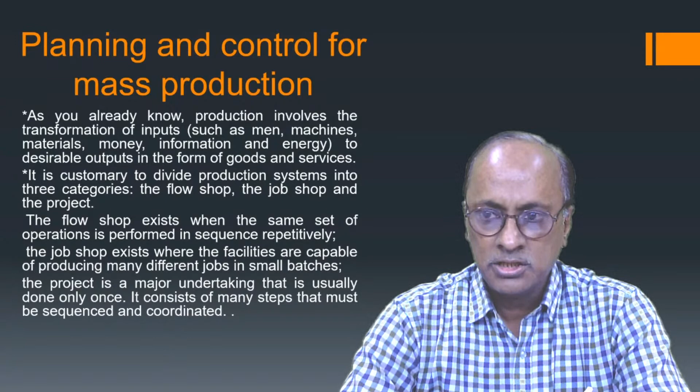So to start with our discussion, I may say that production, which is a transformation process, may take different categories. It may be a flow shop, sometimes called mass production system, where standardized products are produced in a particular sequence with repetitive operations. When you produce different products in small batches, it is called job shop, and project is a major undertaking generally taken once in our lifetime.

Now, what is the nature of mass production? We'll today take up the topic mass production. If you go through the nature of mass production, it was Henry Ford who in 1913 introduced the assembly line and notion of mass production.

So when you talk about mass production, we generally think that the products are for the masses, or production in millions, or for the masses. Though it may be an outcome, it is not exactly the same in meaning. Mass production refers to the manner in which a product is produced.

When you talk about manner, this involves the decomposition of the total task into the minutest elements, the smallest elements, shown usually on a precedence diagram, and subsequent regrouping of these elements according to the norms of production. So an assembly line consists of workstations in sequence where at each workstation a carefully designed portion of work is done. Mass production requires that all parts of an assembly line be interchangeable and that all parts be replaceable, characteristics which permit production and maintenance of large quantity.

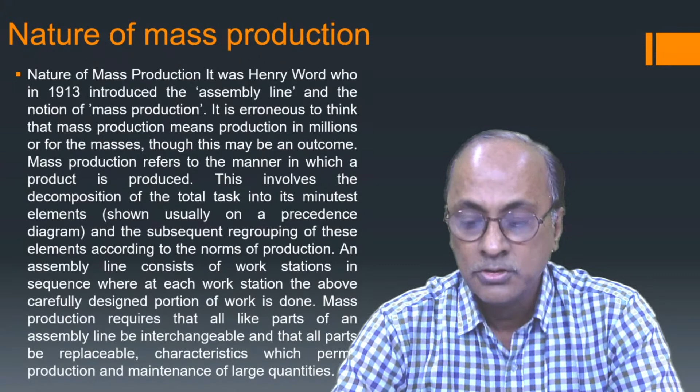So again, mass production is manufacturing a large quantity of standardized products, often using assembly line or automatic technology. Assembly line production, when you talk about mass production, goes hand in hand and should be taken into consideration. So what is assembly line?

It is a production line where materials move continuously at a uniform average rate through a sequence of workstations where assembly work is performed. Typical examples of these assembly lines are car assembly, electrical appliances, TV sets, computer assemblies, toy manufacturing. The arrangement of work along the assembly line will vary according to the size of the product being assembled, the precedence requirement, the available space, the work element, and the nature of the work to be performed on the job.

So assembly line production is a system where materials move continuously - there is no stoppage of materials movement, raw materials movement. It moves continuously at a uniform average rate. That means in the first hour it moves at a certain rate, say 20, and in the second hour it must be around that same rate - a uniform average rate through a sequence of workstations.

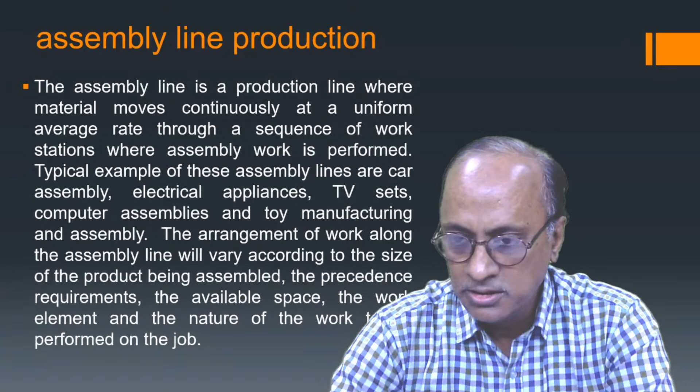So the question arises, where to go for mass production? It's generally agreed that mass production is justified only when production quantities are large and product variety is small. The ideal situation for mass production would be when large volumes of one product, without any change in design, are to be produced.

Continuously for an extended period of time. Now the rate of consumption or demand of the product, as compared to the rate of production, decides whether continuous or batch production is called for. Obviously, only when the rate of demand is greater than or equal to the production rate can mass or continuous production be sustained. If the rate of demand is less than the production rate, batch production with suitable inventory build-up could be resorted to.

So this means that when we go for mass production, first and foremost, you must remember that you prepare large quantity when variety is small. In other words, when products are standardized, mass production is the most ideal situation. The ideal situation for mass production would be when large volumes of one product are to be produced continuously over an extended period.

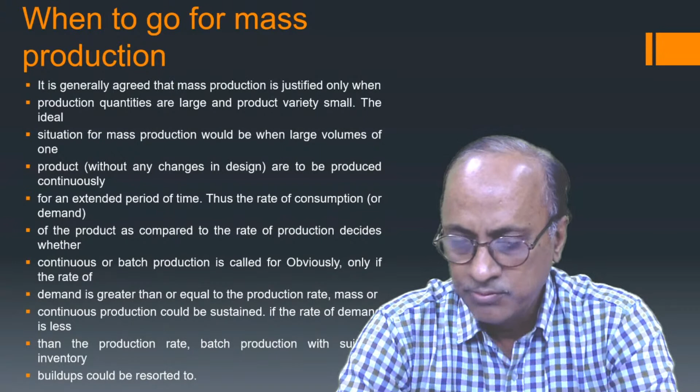and if the demand is greater than or equal to the production rate, then we have to go on producing continuously. If the demand rate is less, what happens? We can produce in batches and keep inventories; inventory build-ups could be resorted to. But if the demand is greater than or equal to the production rate, mass production is justified or advisable. So first, if the product is standardized with little variety or no change in design, we go for mass production.

And again, if the demand is greater than or equal to the rate of production, we go for mass production. Now there are different types of common flow patterns which you have in unit 4 of block 1. The I flow is like the alphabet I in a straight line. The L flow is like the alphabet L. The U flow is like the alphabet U, or it may be an S flow, or a circle flow, or an O flow. Since the work from one process is fed directly to the next, small process inventory results.

So what he says here—what are the advantages? The advantage is that in a mass production system, the production line may have a different flow, but the point is that suppose there are four workstations. The output from the first goes as an input to the second, the output of the second goes as an input to the third, and the output of the third goes as an input to the fourth.

So there is no in-process inventory; even if there is, it may be minimal. Total production time per unit is short because the materials move continuously. Since workstations are located so as to minimize the distance between consecutive operations, material handling is reduced. Since little skill is usually required by operators at the production line, training is simple, short, and inexpensive. Simple production planning and control systems are possible, and less space is occupied by work in transit or for temporary storage.

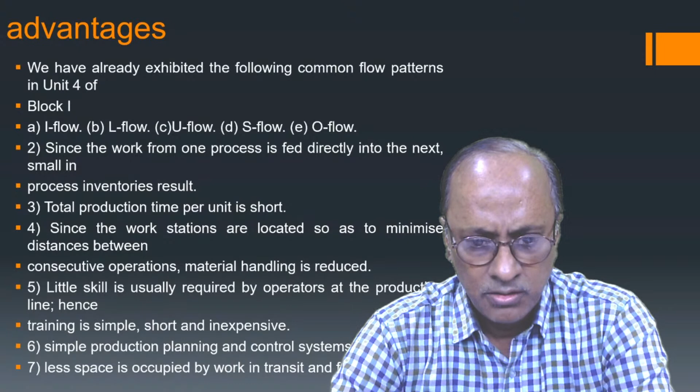Simple production planning and control systems are possible. Since the machines are positioned in a straight line or in a U flow, they have less transit and less space is required. Now, what are the disadvantages we find in mass production?

Since these stations or work units are positioned in a sequential manner, a breakdown of one machine may lead to complete stoppage of the line that follows the machine. Hence, maintenance and repair is a challenging job. This is very important.

As you remember, in a mass production system, the machines or workstations are positioned in a straight line, arranged in a sequential order. Suppose there are 4 or 5 machines. In between them, machine 2 or machine 3 breaks down. If machine 2 breaks down, then whatever output machine 1 sends, machine 2 is not in a position to receive it. Similarly, work at 1 is stopped, work at 2 is stopped, the 3rd work is stopped, the 4th machine's work is stopped. So the entire system is jeopardized, the entire system comes to a halt. So maintenance and repair is a challenging task.

Since the product decides the layout, changes in product design may require major changes in the layout. This is often expressed by saying assembly lines are inflexible. So mass production or assembly lines are inflexible.

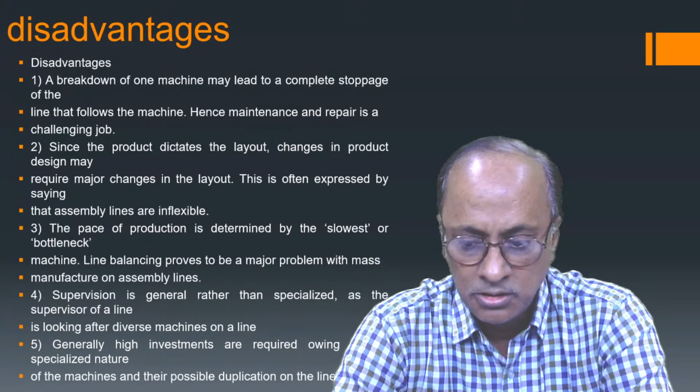Assembly line balancing is arranging the individual processing and assembly tasks at the workstations so that the total time required at each workstation is approximately the same. Assembly line balancing is strategically planning, locating, and sequencing workstations. Following are examples where there is a need to balance the assembly line in manufacturing: assembly lines for manufacturing automobiles, assembling aircraft, and shipyard production all require such balancing.

Assembly line balancing is nothing but arranging the individual processing and assembly tasks at the workstation so that the time required by each workstation is approximately the same. That means we are balancing it.

It is useful to consider two types of line balancing problem: assembly line balancing and fabrication line balancing. The distinction refers to the type of operation taking place in the line to be balanced. The term assembly line indicates a production line made of purely assembly operations, involving the arrival of individual component parts at the workplaces and their departure fastened together in the form of an assembly or sub-assembly. The term fabrication line, on the other hand, implies a production line made of operations that change the physical or sometimes chemical characteristics of the product involved. Machining or heat treatment would fall into operations of this type. So there is a distinction between assembly line balancing and fabrication line balancing.

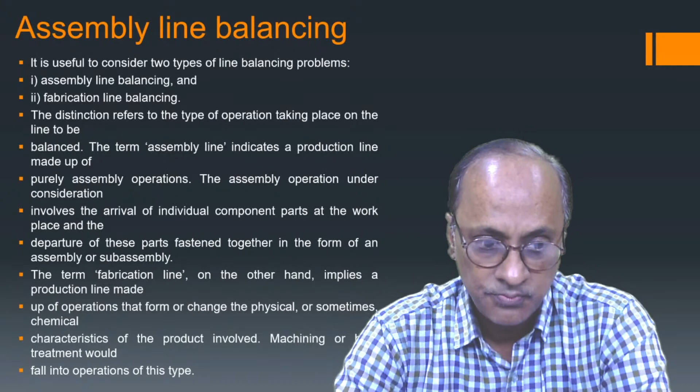The assembly line indicates a production line made of purely assembly operations. Assembly operation involves the arrival of individual components at the workplaces, and after arrival it is put together, fastened together in the form of an assembly or sub-assembly, we join it. But the term fabrication line, on the other hand, implies a production line made of operations which change the physical quantity or physical characteristics or chemical characteristics of a product.

What are the broad objectives of an assembly line? The broad objective in design, as seen in two important manufacturing developments which led to progressive assembly, are the concept of interchangeable parts and the concept of division of labor. This permits progressive assembly of the product as it is transported past relatively fixed assembly stations by a material handling device such as a conveyor. The work elements established through the division of labor principle are assigned to workstations so that all workstations have nearly an equal load.

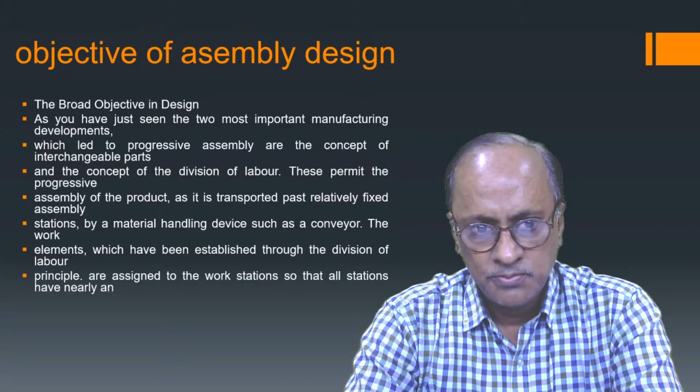Second is the division of work. The individual work elements or tasks are grouped into workstations. The station time, which is the sum of the times of the work elements performed at that station, should not exceed the cycle time. That means the time taken by a particular workstation is called the station time, and when you fix the station time, it should not exceed the cycle time.

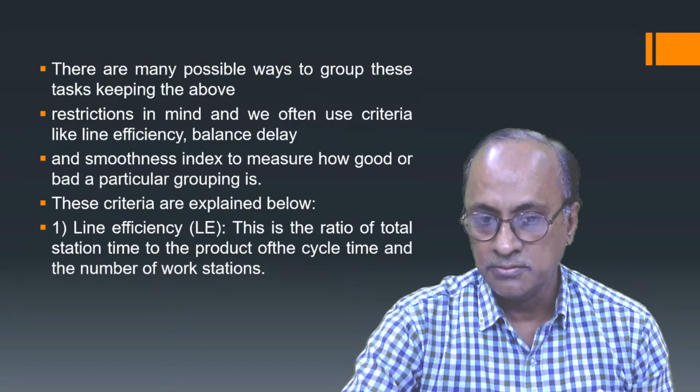Balance delay (BD) is a measure of the line inefficiency. It is the total idle time of all stations as a percentage of the total available working time of all stations. Suppose 10 hours is available and I am idle for 3 hours, so it measures that idle time as a percentage of the total.

Smoothness index is an index to indicate the relative smoothness of a given assembly line. A smoothness index of 0 indicates perfect balance, meaning the assembly balancing is perfect. So these are the 3 criteria.

Assembly line balancing is strategically planning, locating and sequencing workstations. We do this in aircraft manufacturing, automobile manufacturing, shipbuilding, etc.

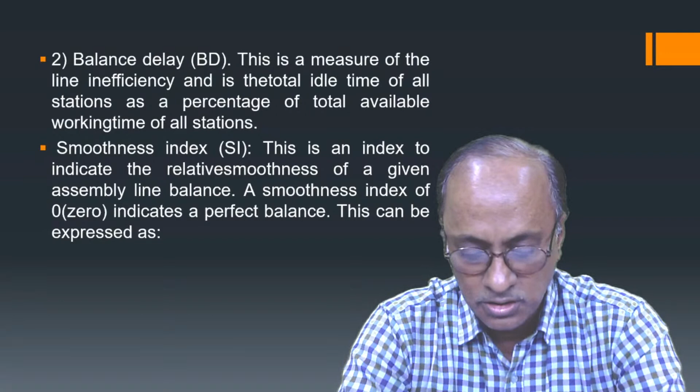There are different steps in calculating this assembly balancing: calculate the task time, perform time studies, identify the bottlenecks and excess capacity, relocate the resources, and make other improvements. While doing the time study, we identify bottlenecks and excess capacity, then relocate resources and make other improvements.

Two important gentlemen developed a model called the Kilbridge and Wester method. In this procedure, numbers are assigned to each operation based on how many predecessors it has. Operations with the lowest predecessor numbers are assigned first to the workstation. The procedure consists of the following steps.

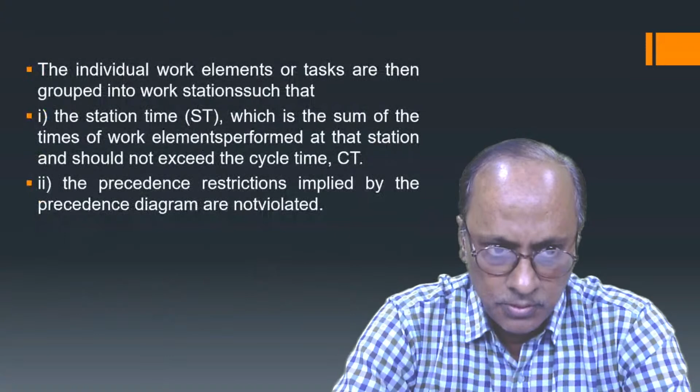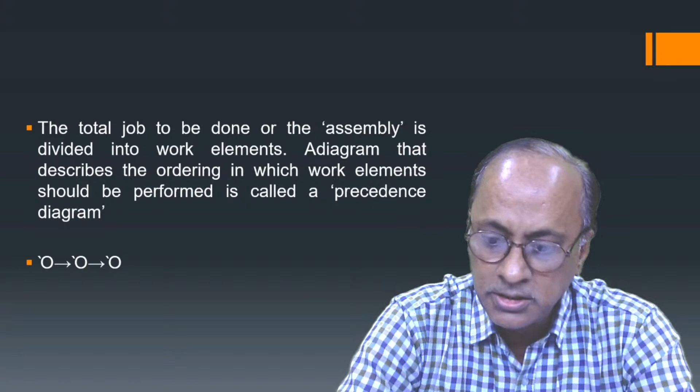In this method, I have told you 1, 2, 3 — element 3 has the maximum predecessors, 2 and 1, while element 1 has no predecessor at all. So in this model, numbers are assigned 1, 2, 3, 4, 5, 6.

We find which element has the lowest predecessor count and construct the precedence diagram for the work elements. In column 1, list all work elements that need not follow others. In column 2, list work elements that must follow column 1, and continue in the same way for other columns. The elements within a column can be assigned to a workstation in any order, provided all elements of the previous columns have been assigned.

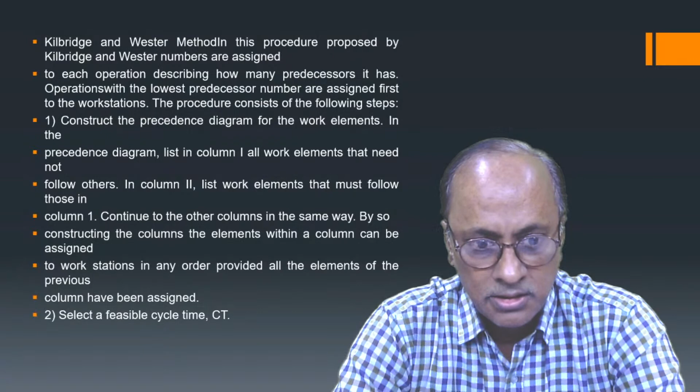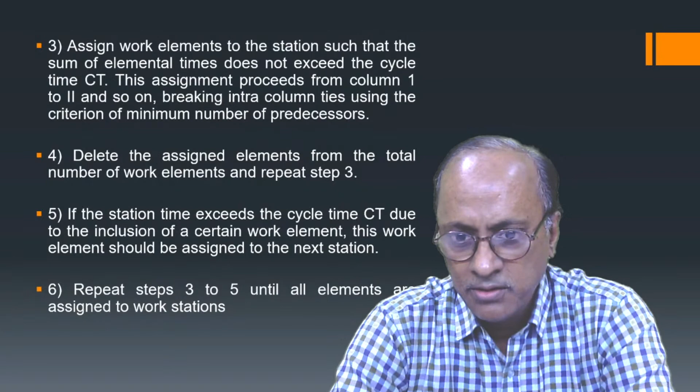Then select a feasible cycle time, and assign work elements to the station such that the sum of the element times does not exceed the cycle time. This assignment proceeds from column 1 to column 2 and so on, breaking intra-column ties using the criterion of minimum number of predecessors. Delete the assigned elements from the total and repeat the step. If the station time exceeds the cycle time due to inclusion of a certain work element, that element should be assigned to the next station. Repeat these steps until all elements are assigned to workstations.

Then there's the Helgeson and Birnie method, also used for assembly line balancing. First, determine the positional weight of each work element — that means finding the importance of each work element. Rank the work elements based on their positional weight.

The work element with the highest positional weight is assigned to the workstation first. If any additional time remains at a workstation after assignment of an operation, assign the next succeeding ranked operation to that workstation, as long as it does not violate the precedence relationship and the assigned time does not exceed the cycle time. This is important.

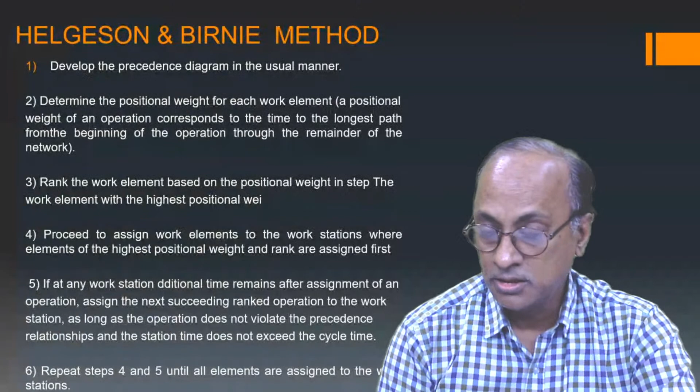Repeat step 4. If you go through your study materials, you can find how the problems are done, but this uses different methods and steps. First, find the positional weight of each work element. Then rank the work elements based on positional weight. Then assign the work element to the workstation which has the highest positional weight. If any time is left over, assign the next highest ranked operation, as long as it does not violate the precedence rule and the station time does not exceed the cycle time.

Each worker at his station is assigned an equal amount of work, a certain set of work elements, which he performs repeatedly on each production unit. Assembly line balancing is generally about minimizing the total amount of idle time, or equivalently, minimizing the number of operators needed to do a given amount of work at a given assembly line speed.

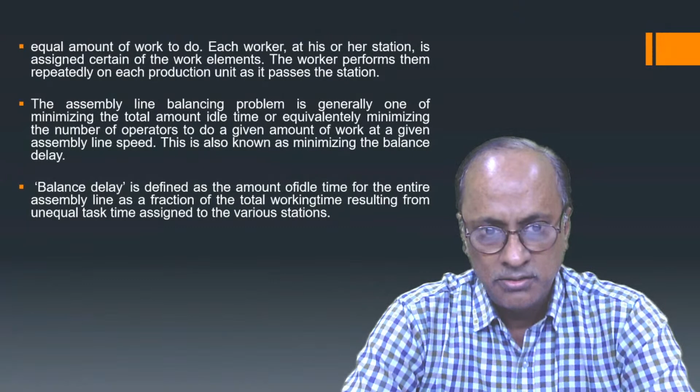Balance delay is defined as the amount of idle time for the entire assembly line as a fraction of the total. This I have already discussed.

So, the assembly line balancing problem is generally about minimizing the total amount of idle time, or equivalently, minimizing the total number of operators to do a given amount of work at a given assembly line speed. This is also known as minimizing balance delay. Balance delay is defined as the amount of idle time for the entire assembly line as a fraction of the total working time, resulting from unequal task times assigned to various stations.

Kilbridge and Wester, after studying the variation in idle time at stations caused by different assembly line balances, concluded that high balance delay for an assembly line system for a specific product is caused by a wide range of work elements, a large amount of inflexible line mechanization, and indiscriminate choice of cycle times. However, as we will see, the cycle time is often dictated by a specific desired production rate, which may not lead to low balance delay.

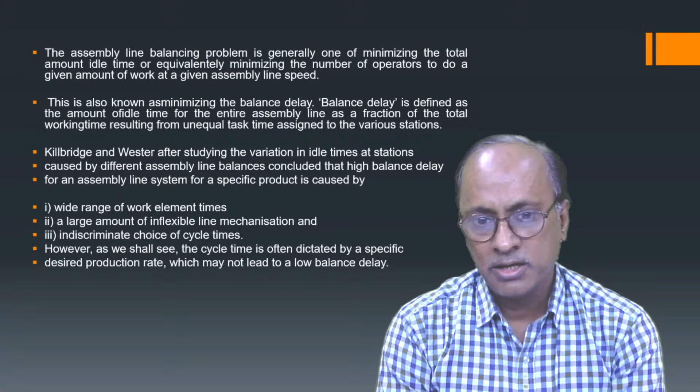So, Kilbridge and Wester made an extensive study of the variations at stations and why there is high balance delay. It is due to important factors such as a wide range of work elements, a large amount of inflexible line mechanization, and indiscriminate choice of cycle time.

Now, what are the problems and prospects of this? In both line balancing methods discussed previously, it was assumed that work element times are constant. In practice, these times may vary randomly due to factors like human variability, fatigue, and carelessness on the operator's part. Even in machine operations, the setup or positioning time of the part or components could lead to random variation in individual work element times. Since the assembly line is balanced for a given set of work element times, the effect of these variabilities is twofold: greater idle time at some workstations and reduction of the average production rate of the line.

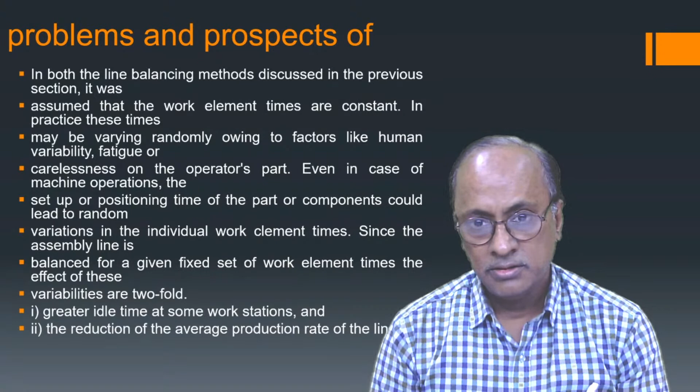So in theory or in the model, we assumed that the time of the work elements is constant. But in practice, this may not be possible at all, because the work elements are performed by human beings, and human beings are not robots or machines. So some variability is there, some fatigue creeps in, and some carelessness on the part of the operators. Even in machine operation, there is some setup time, some breakdown, and positioning time that could lead to random variation. So we cannot always assume that the time taken at all workstations will be the same. There must be some variability.

Yes, problems and breakdowns at workstations. A mass production system consists of a number of stages in series at which operations are performed. A failure or breakdown at one stage or workstation will result in the failure of the entire production system until repair is completed. The result could be decreased production rate. This problem is handled in practice by providing efficient maintenance service so that breakdown units are repaired and put into service as soon as possible, and by providing buffer storage of semi-finished goods between each pair of stages so that the entire line does not stop due to the failure of one of the units.

So, the second important problem is breakdown at a workstation. If a breakdown occurs at any one of the workstations, the entire system will fail, and unless it is repaired, the workstations will not deliver.

If the breakdown occurs, it will result in decreased production rate, and these problems can be overcome by two efficient measures: maintenance service, so that whenever a breakdown occurs, it should be taken into consideration and repaired immediately, or you can maintain a buffer stock of semi-finished products between a pair of stages.

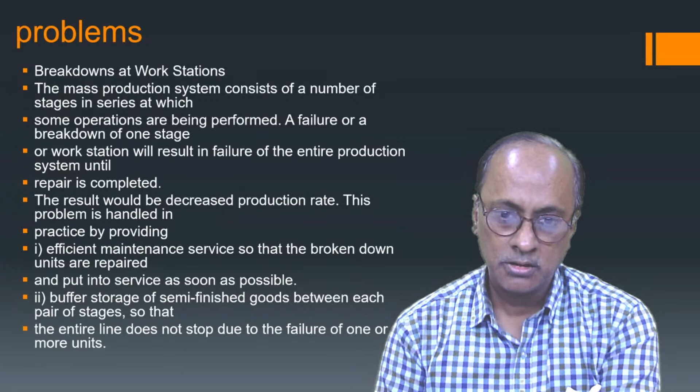Suppose there are three machines, 1 to 2, 2 to 3. We should keep some inventory of the semi-finished products of machine 2, so that even if machine 2 goes wrong, we can get this semi-finished product of machine 2 to feed to machine 3.

The question of how much buffer storage to allocate between stages is of great practical importance. If you keep a higher buffer stock, it means a greater tie-up of capital, but a lower risk of runout and subsequent line stoppage due to breakdowns. The decision to estimate the size of the buffer stocks can be governed by one or more of the following criteria.

Consider what the buffer size should be: maximize the production rate of the system, minimize the total production cost, and maximize the availability of the production system. So in the last slide, we told you one remedy for this failure is to maintain buffer stock.

But the question arises, how much buffer stock should we maintain? If you maintain too much buffer stock, then our capital is tied up. But too much buffer stock also has one advantage: it will have lower risk of runout and subsequent stoppage. So when you take a decision on what our buffer stock size should be...

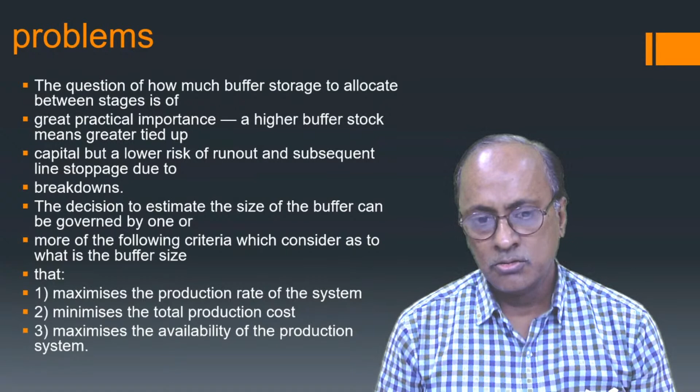We take into account three important criteria: it should maximize our production rate, it should minimize our production cost, and it should also maximize the availability of the production system.

Then multi-product line. One of the major disadvantages with assembly lines is relative inflexibility. A line is usually designed for one product, and changes in the design of the product can often be difficult to accommodate on the line unless suitable adjustments are made at the workstation.

But when similar products, in which a large percentage of the tasks are common, have to be manufactured, the possibility of using the same production line for the products can be explored. Since tasks are fixed within stations once balanced, station times and efficiency will vary with the products being produced. A great variety in these efficiencies might dictate that separate lines be utilized. In case a multi-product line is to be designed, a common precedence diagram must be developed.

So one of the major disadvantages of an assembly line is relative inflexibility. That means the assembly line is meant to produce a particular type of product. If there are any changes, we cannot accommodate that change unless we change our workstation.

But when similar products, in which a large percentage of tasks are common, have to be manufactured, then the possibility of the same production line for the products can be explored. So if a large percentage of tasks are common, suppose there are similar products which require say 80% of the work to be similar, then we can consider a multi-product line.

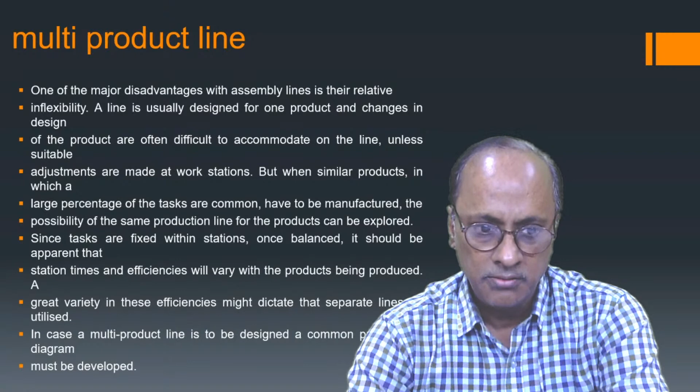So what is modular production? In modular production, we tend to specialize in the production of particular parts or activities that can then be included as components of more than one product or service. The reason for wanting to achieve such a commonality is that one part or operation, if used in several products and services, can accumulate sufficient demand volume to warrant investment in a flow shop.

Yes, that's what he's saying. If a component can be used in more than one product or service - suppose a picture tube can be used in a computer and can also be used in a TV or monitor, or an LCD screen which can be used in both products, in both components.

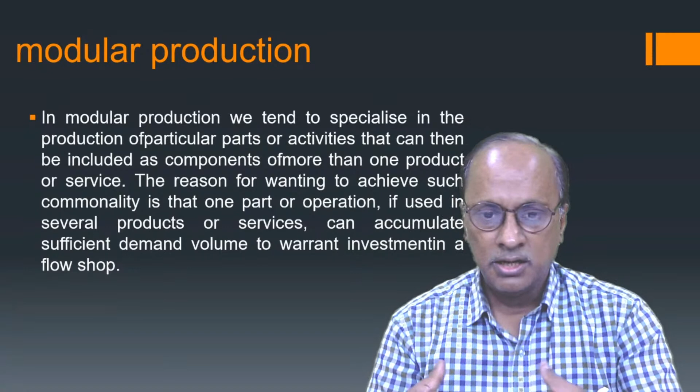So the advantage of modular production is that if a particular commodity, one part or operation, is used in several products and services, the demand for that part or operation will increase, so that we can invest in a flow shop or mass production shop.

Group technology provides another aspect of the same basic idea. It refers to specialization in families of similar parts, hence components requiring primarily turning operations such as shafts are collected in one group, while components requiring surface grinding, drilling operations such as plates are arranged into a different group. These groups become the basis on which a traditional process plant layout can be reorganized into a group technology plant layout, in which machines are arranged so that each machine is assigned to the production of one group of parts. Group technology typically affects only the component manufacture stage, not the assembly stage of production.

What is group technology? It is sometimes called a cellular type of layout, where we create different cells, different departments, and in each department we keep similar types of machines. Each cell or each group specializes in producing similar types of parts.

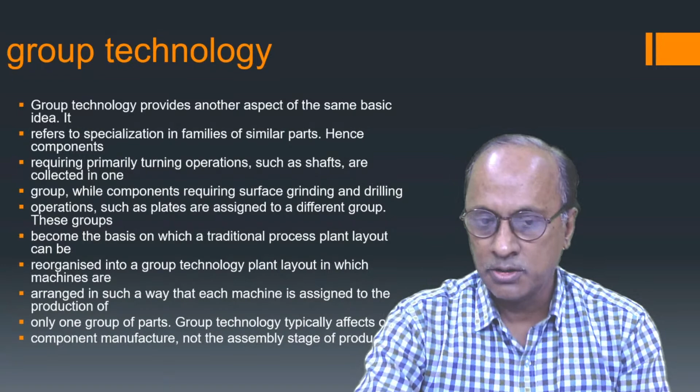Then automation and robotics. Mass production has been replaced to a large extent by automation and robotics in recent times. Automation generally refers to bringing together three basic building blocks: machine tools, material handling, and control.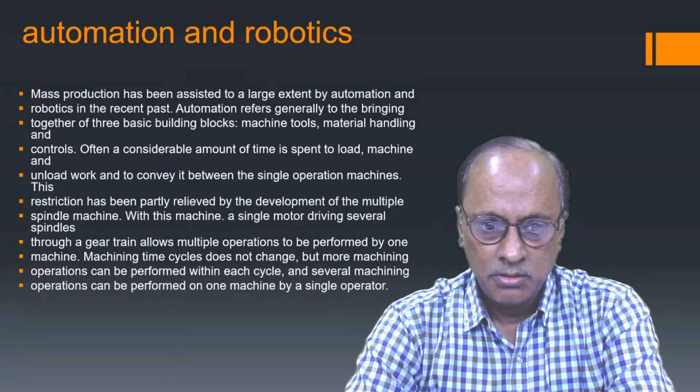Often, a considerable amount of time is spent loading the machine, unloading work, and conveying it between single operation machines. This restriction has partly been relieved by the development of multiple spindle machines. With this machine, a single motor driving several spindles through a gear train allows multiple operations to be performed by one machine. The machine time cycle does not change, but more machining operations can be performed with each cycle, and several machining operations can be performed on one machine by a single operator.

Then industrial robotics. An industrial robot is defined by the Robot Institute of America as a programmable, multifunction manipulator designed to move material, parts, tools, or specialized devices through variable programmed motions for the performance of various tasks. What separates an industrial robot from other types of automation is that it can be reprogrammed for different applications, and robots fall into the category of flexible automation, as opposed to hard or dedicated automation.

So in a single word, industrial robots are flexible automation. They are programmed for a particular work - a program is written. A robot is a multifunction manipulator designed to move materials, parts, tools, or specialized devices through variable programmed motions.

What is the difference between ordinary automation and robotics? Ordinary automation is dedicated, or rigid automation - there is no flexibility. Whereas industrial robots are flexible automation, where if any change is required, they can be reprogrammed.

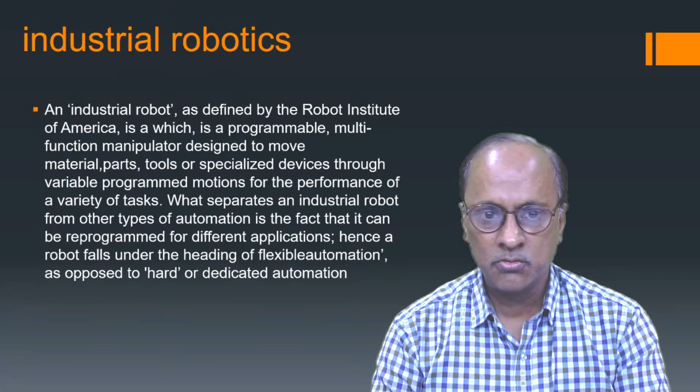The industrial robot consists of three basic components: the manipulator or arm, which is a series of mechanical linkages and joints capable of movement in various directions to perform the work task; the controller, which directs the movements and operations performed by the manipulator and may be an integral part of the manipulator or housed in a separate cabinet; and the power source, which provides energy to the actuators on the arm. The power source may be electrical, hydraulic, or pneumatic.

The major reasons for the use of robots in industry are increased productivity, easy adoption, safety in use, ease of training, high return on investment, and greater reliability - meaning they perform tasks correctly. Robots are currently in operation in welding and assembly lines, drilling and routing, inspection, material handling, machine loading, die casting, and a variety of other applications. So industrial robots have three parts: the manipulator and the controller.